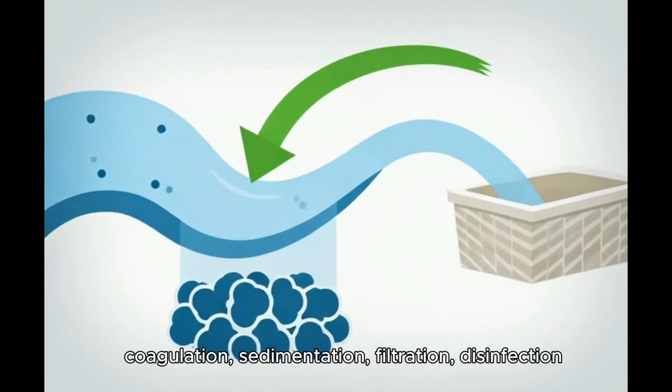Clean, safe water is the foundation of our daily lives. In Malaysia, every drop from the tap has been on an extraordinary journey. It's drawn from raw water sources like rivers, then undergoes a rigorous engineering process: coagulation, sedimentation, filtration, disinfection, before becoming reliable drinking water.

But on the evening of January 14, 2025, Sungai Kabul at Beranang turned into this. The river had turned pink along a 500-meter stretch. News of a pink river instantly trended locally.

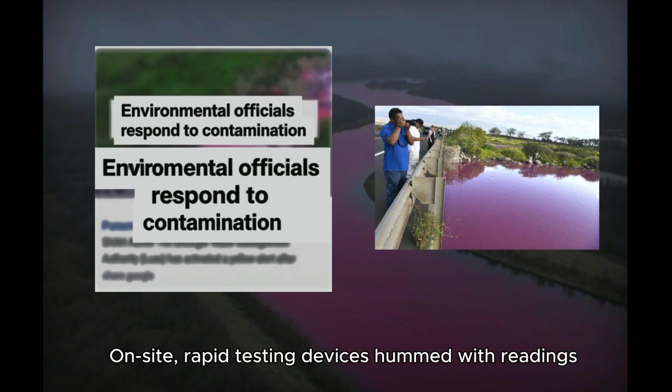LUAS's emergency team rushed to the scene. On site, rapid testing devices hummed with readings. Each sample collected aimed to answer the critical questions: what's in it, and where did it come from?

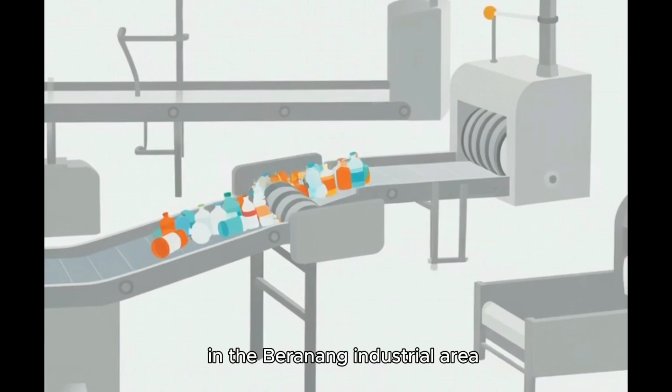LUAS's initial investigation pinpointed the source: a plastic recycling factory in the Beranang industrial area. The factory admitted to an accidental release of process effluent that night. Faulty infrastructure allowed untreated wastewater into storm drains, flowing into Sungai Kabul.

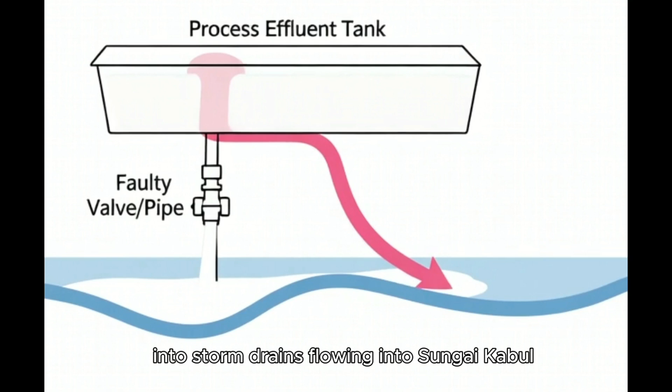So what's actually in this pink effluent? Final analysis is pending, but the plastic recycling industry suggests it contains industrial dyes and pigments, the direct agents of the color change; toxic plastic additives like plasticizers and stabilizers; microplastic particles; possibly surfactants from cleaning processes; and heavy metals that could come from plastic pigments or factory equipment.

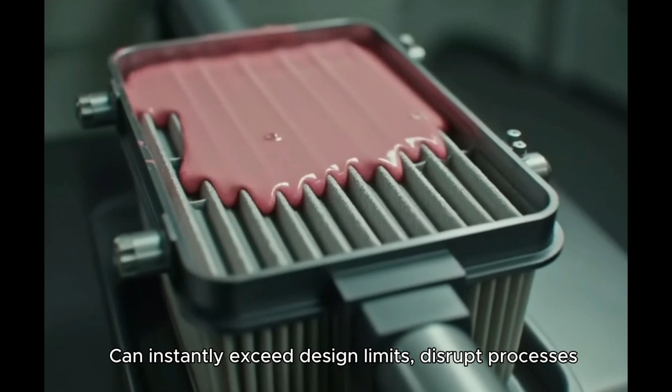When pollution breaches our defenses, it triggers a chain reaction impacting us all. First, water treatment plants bear the brunt. Pollutants like those in Sungai Kabul require longer retention, can instantly exceed design limits, disrupt processes, leading to severely non-compliant treated water. Crisis response forces plants to use massive, costly extra chemicals like special coagulants and activated carbon.

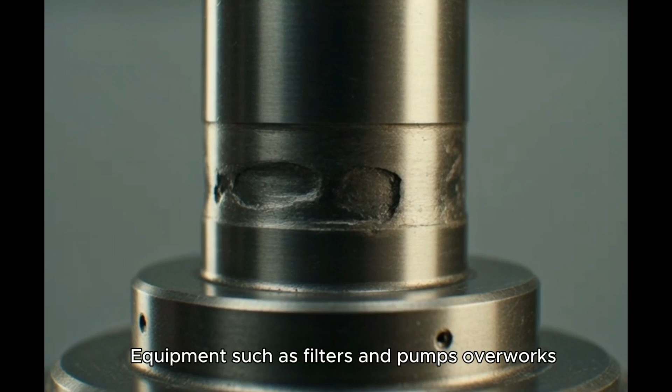Equipment such as filters and pumps overworks, maintenance frequency and costs soar. Worse, toxic sludge volume multiplies, requiring expensive disposal.

In nature, pollution causes direct, acute toxicity, leading to mass aquatic life kills. It coats and suffocates plants, destroys spawning grounds and habitats. Pollution-sensitive species vanish first, collapsing the river's ecological web and biodiversity.

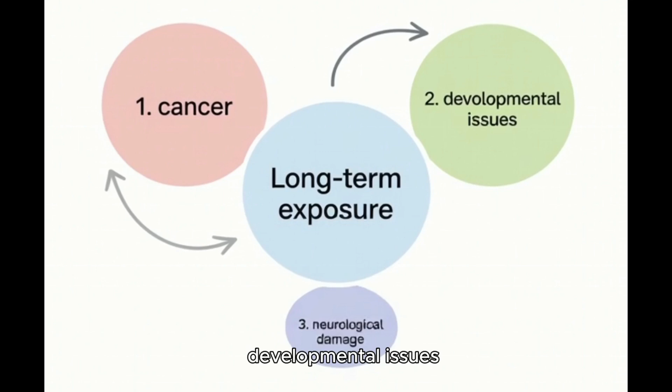Ultimately, the threat returns to us. Pollution greatly increases outbreaks of waterborne diseases like typhoid and cholera. More insidiously, pollutants like heavy metals and certain plastic additives bioaccumulate in fish, entering our food chain. Long-term exposure can lead to cancer, developmental issues, or neurological damage, harming generations.

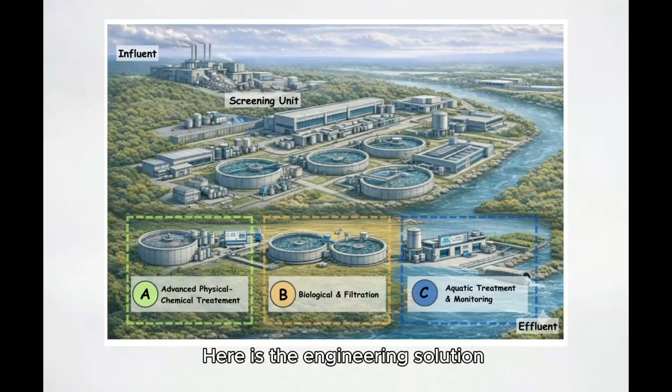Confronting complex industrial effluent like Sungai Kabul's requires more than conventional methods. It demands a purpose-built, multi-stage deep treatment system. Here is the engineering solution: a plant integrating advanced physical-chemical treatment, biological filtration, and aquatic treatment and monitoring.

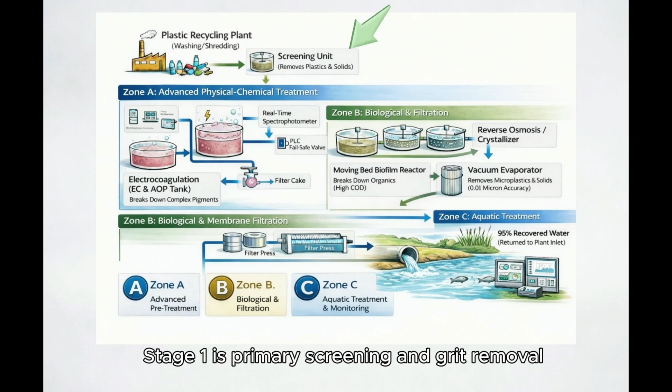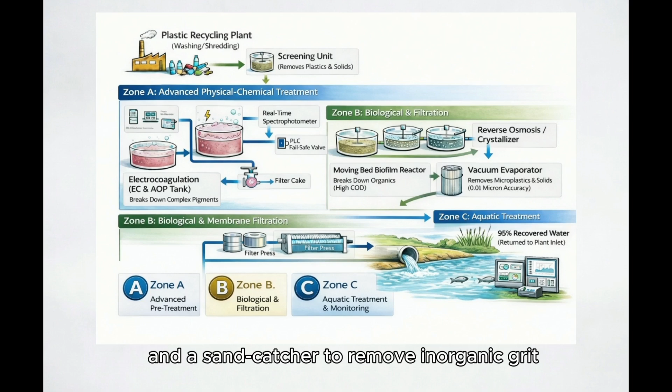Stage 1 is primary screening and grit removal. Install a rotary drum screen, about 1 mm to 10 mm, to capture large plastic fragments, and a sand catcher to remove inorganic grit. Then the waste will be sent to Zone A, advanced physical-chemical treatment.

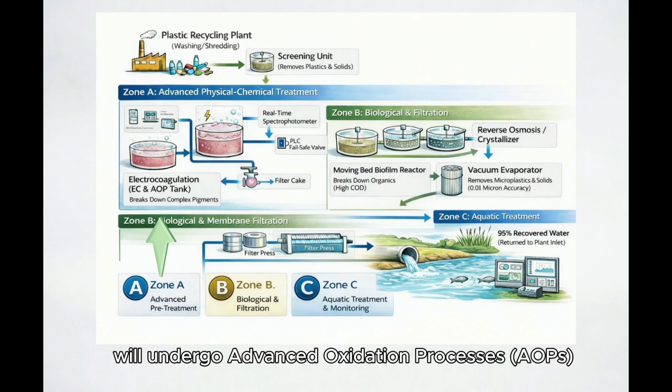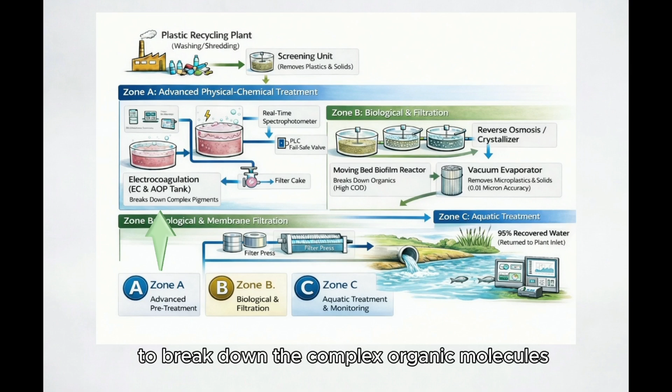First, the waste will undergo advanced oxidation processes, AOPs. Since the water in Sungai Kabul turned pink, simple filtration won't suffice. AOPs such as Fenton's reagent or UV/ozone break down the complex organic molecules responsible for the pigment. This unzips the chemical bonds of the dye, making it colorless and biodegradable.

Next, instead of just adding chemicals which create more sludge, electrocoagulation (EC) uses electrical current to destabilize pollutants, which is particularly effective for removing the fine plastic particles and pigments found in recycling effluent.

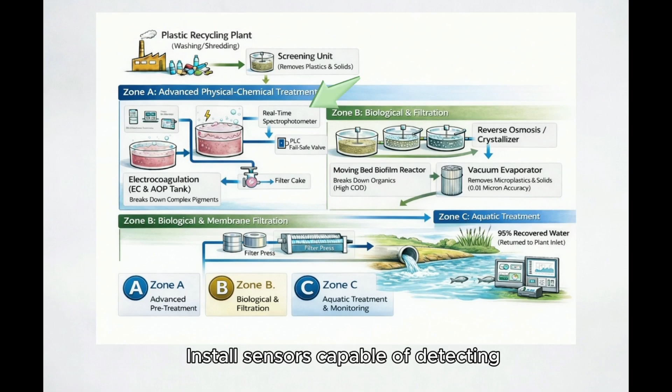Zone A also has real-time spectrophotometry. Sensors are installed capable of detecting specific wavelengths associated with the pink dye. If absorbance levels rise above a threshold, a PLC, programmable logic controller, instantly diverts the flow to an emergency holding tank, EHT. After that, the waste passes to Zone B, biological and filtration treatment.

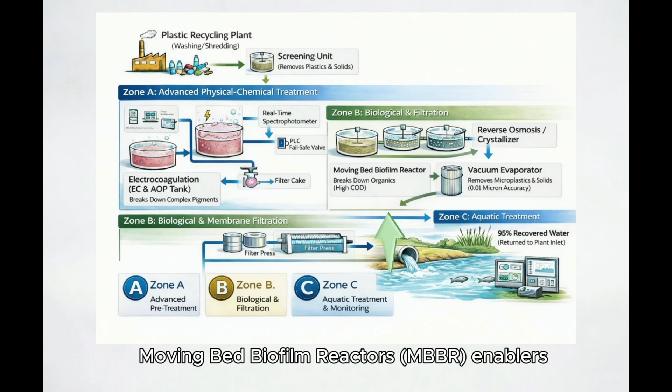Moving bed biofilm reactors, MBBR, enable higher treatment efficiency and smaller footprints. In an MBBR, millions of tiny plastic surfaces act as carriers to cling to, allowing for a much higher concentration of bacteria in a much smaller tank.

The next part is the reverse osmosis unit, RO. Reverse osmosis is the super filter of a wastewater treatment plant. While regular filters catch sand or dirt, RO works at a molecular level to remove dissolved chemicals, salts, and even the smallest pigment particles that cause the pink color in the river.

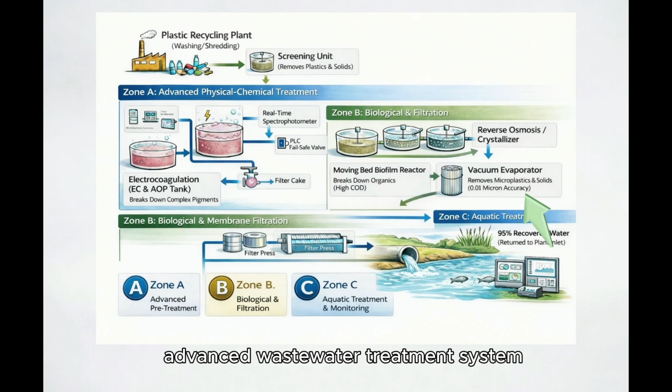In our solution, we will add a vacuum evaporator. This advanced wastewater treatment system separates water from contaminants by boiling the liquid at a much lower temperature than normal, around 30 to 40 degrees Celsius. The pink dye molecules in the solution cannot evaporate; they stay at the bottom, while only pure water vapor rises.

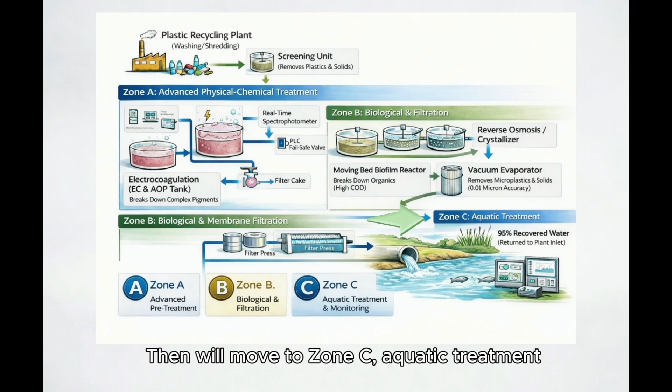Then we move to Zone C, aquatic treatment. This is the guard zone. Its job is to ensure that the high-tech cleaning done in Zones A and B actually worked before the water touches the environment. At this zone, an AI monitoring system measures pH, turbidity, and COD in real time.

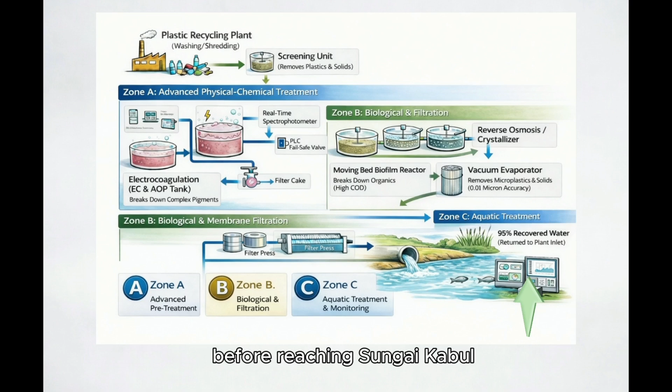To enhance our treatment system, we also have nature-based solutions, NBS, as a final buffer in Zone C. After technical treatment, the water could pass through a small engineered wetland before reaching Sungai Kabul. Plants like Phragmites or Typha provide a final polishing step, absorbing residual nutrients and providing a visual green indicator of water health.

Our solution first paints environmental revival. Short-term, it halts pollution and reduces acute harm. Long-term, the river regains life, with full ecological functions restored.

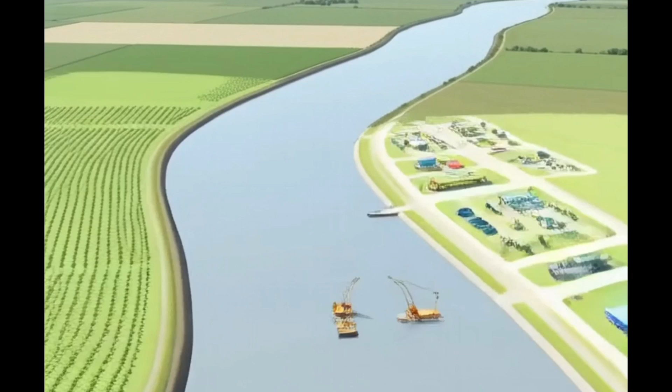What unfolds next is economic resilience and savings. Despite upfront investment, in the long run it drastically reduces massive plant operation costs and public health expenses. More crucially, it steadily nourishes agriculture, fisheries, tourism, and the entire community economy, completely avoiding water crises and colossal losses.

The story concludes with social health and justice. Beginning with raised community awareness, it ultimately secures a most basic human right: safe water for all. It directly reduces the societal disease burden and enhances public well-being and productivity.

In Malaysia, clean water is fundamental, yet our raw water sources face constant and widespread threats. From peninsular to East Malaysia, from industrial heartlands to agricultural basins, alarms for raw water contamination are sounding everywhere.

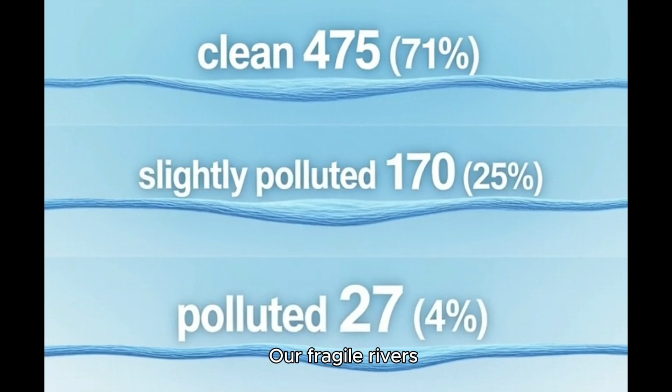From DOE, the Department of Environment Malaysia, of the 672 major rivers monitored nationwide, 475 (71%) were classified as clean, 170 (25%) as slightly polluted, and 27 (4%) as polluted. The data doesn't lie; our fragile rivers are sending a collective distress call.

Precisely because the challenge is vast and widespread, the power of every single one of us becomes more crucial than ever. The real change starts with each person's choices and actions. You have the power to make a difference. Protect our waters, secure our future.